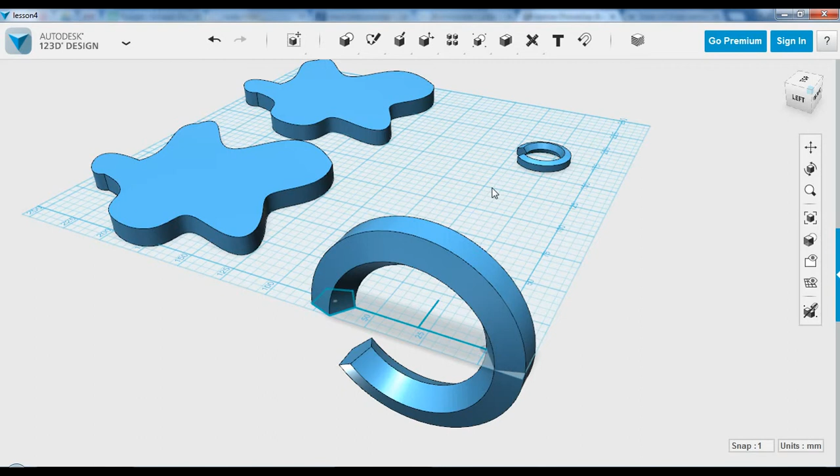We're going to cover some new things in this tutorial, first being designing something to be a specific size. This first bangle we've designed to match a 60mm wrist, since we measured a wrist and that's the widest part, so if we make it that size it will fit. You can see I've set it up to 60 here.

We're going to use a new tool for this, the Revolve tool. Just as a guideline to make sure we've got the right size, we'll draw that 60mm line, and a second line from the center. You'll notice the triangle comes up when it snaps to the center, and a line coming out perpendicular, the length doesn't really matter. This is the middle of the bangle.

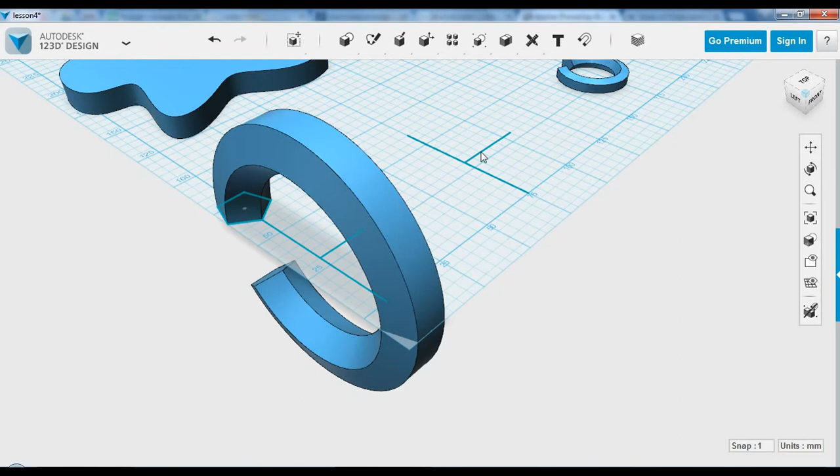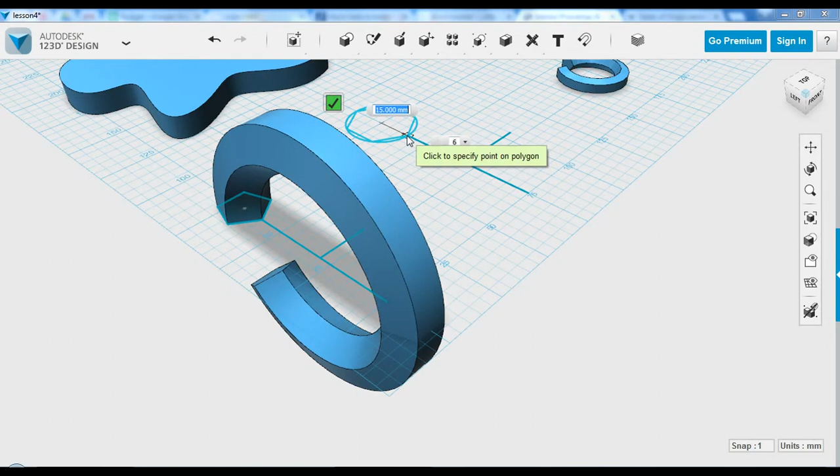To do our Revolve tool, we simply need to draw some sort of 2D profile, using any combination of the tools we've learned about so far. In this one, I'm going to use a Polygon. It's important that the internal shape doesn't go past that guideline. So here would make it bigger than 60, here would make it smaller than 60, so we want the edge to touch just there. I'll press the tab key to change this to a 5-sided polygon and click, and that's the minimum I need to do a revolve.

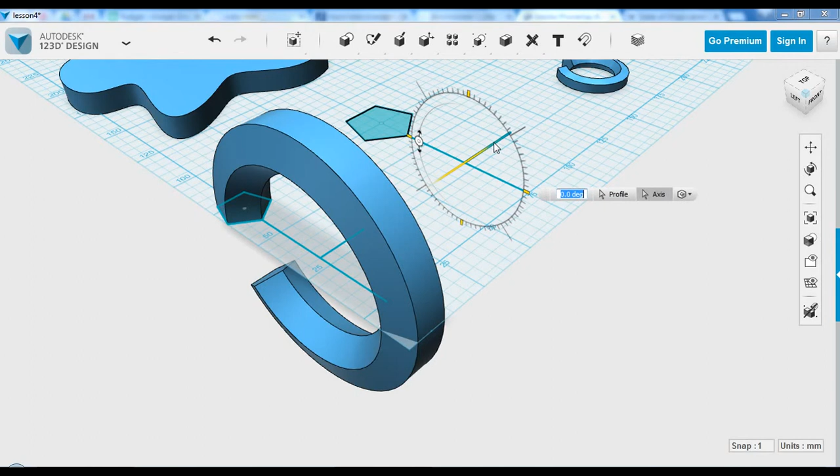From the construct menu we go to Revolve, and we need to input two things. First is the profile - we click in the middle of the shape so it gets a green outline. Then we switch it to axis and click our center line. Now we have the option to revolve that shape around the middle. If doing a full revolution, type in 360, but for this bangle we'll leave a little gap, hoping it will flex and make it easier to get on and off.

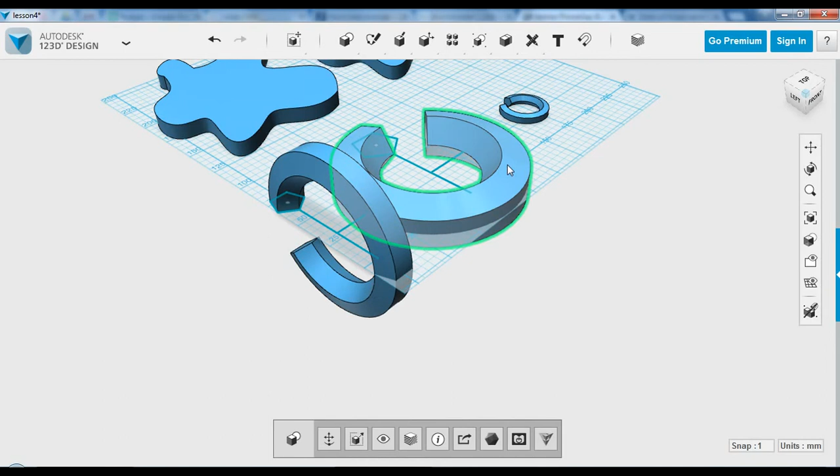This is now facing sideways compared to the grid, so we click it, go to the move menu, and rotate it 90 degrees to the side. Click off to save, and we use a keyboard shortcut called drop - pressing D on the keyboard - and whatever object is selected will drop to touch the bottom of the grid perfectly.

This is all fine if we're designing from scratch for a certain size, but what if we've already designed something without paying attention to size, and need to scale it? First we measure how big it currently is. We know we want the inside point to be 60 diameter, so we use the measure tool, and we can see here we have 10.12 radius - we're actually aiming for 30.

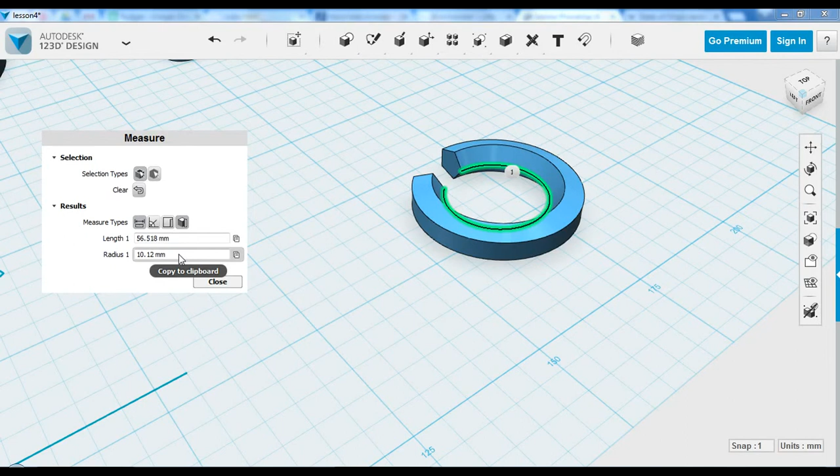So we use a calculator, a very simple sum: the desired measurement, 30, divided by the actual measurement, 10.12, gives us a ratio - in this case 2.9644 and a whole bunch of other numbers. We keep that number stored in the calculator, click on the shape, then scale, and type that number straight in: 2.9644. You can see it scaled up by hopefully the perfect amount.

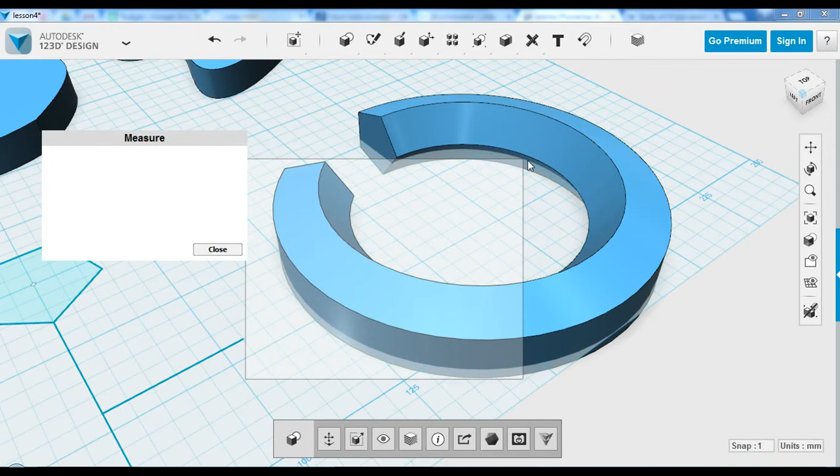If we come back to the measure tool and click on that internal shape, we can see the radius is 29.994, which should be close enough for what we need. Once again we press drop to set up that piece.

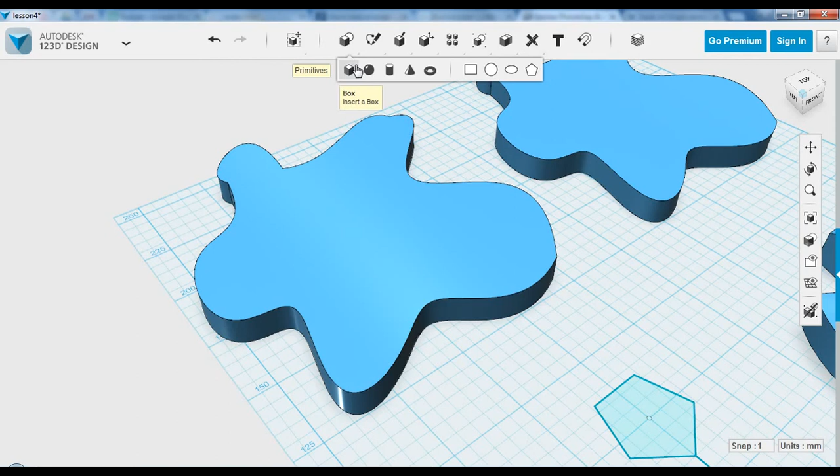Another scenario is you've drawn an existing shape but need to put a hole in it to make it a bangle. We've got two ways of doing this. The first is to do a cylinder - once again we set the radius to 30, because for the wrist we're designing for we want it to be 60 diameter, and we make the height really tall. We click where we want it to go. The key is to click and move the cylinder so it goes entirely through the other shape, because we're going to use it to punch a hole.

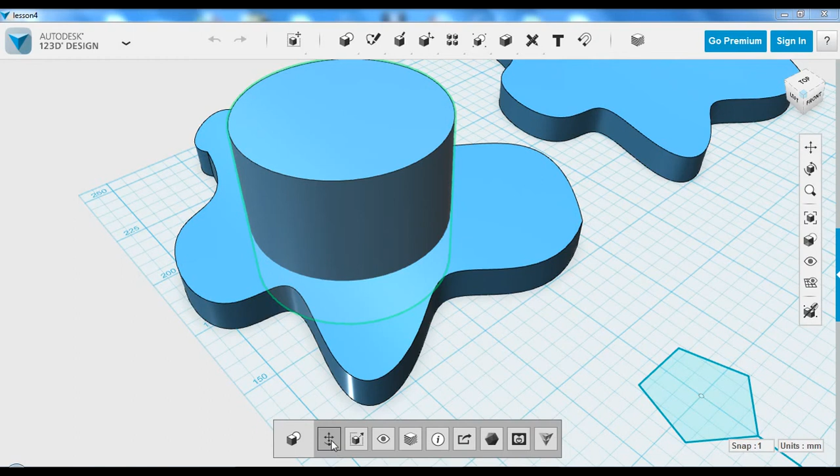I'll slide that down - as you can see, it goes through the bottom. Then we come up to the combine menu and select subtract. The order is very important here: our first click needs to be what we want to keep, our second click needs to be the shape we're using to cut with. And the hole is cut - it should be at a diameter of 60 because that's what we input.

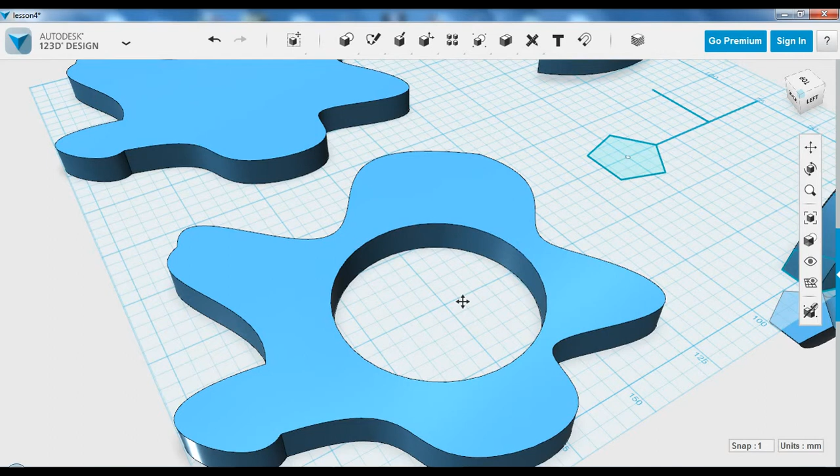The second way to do this is by simply doing a sketch on the top surface - not on the grid, notice the difference here, on the top surface of our shape. We could draw a simple circle set to 60, which I didn't do here, but you would set yours to what you wanted, and then extrude straight down.